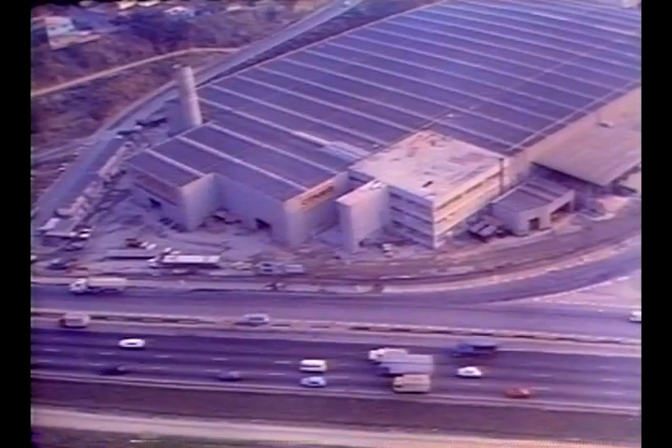This is CONSID, the largest manufacturer of precast concrete construction in Brazil. Check for yourself the concrete facts that allow CONSID to hold 70% of the market and keep on growing, and the solid reasons why CONSID is the ultimate word in precast and post-tensioned construction.

From the early stages of precasting to the end of construction, CONSID employs strict control to ensure that the instructions in this manual are followed with precision.

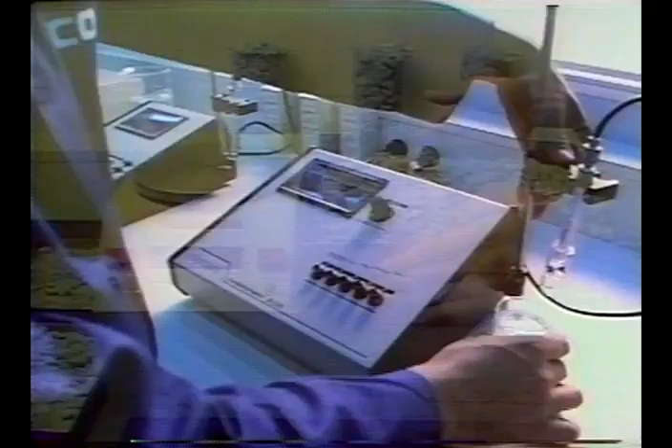At CONSID, reliable technology developed since 1958 and strict quality control are basic factors. Control begins with raw materials and follows through all the steps of construction.

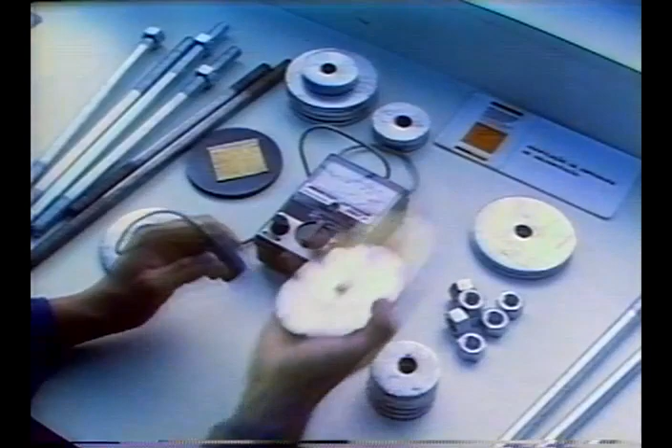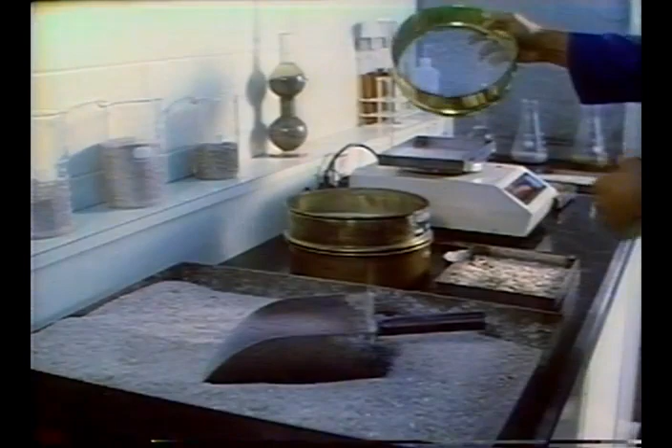In addition, CONSID employs more than 70 professionals, totally independent from production, whose single concern is quality. Quality control is exercised daily, piece by piece, part by part.

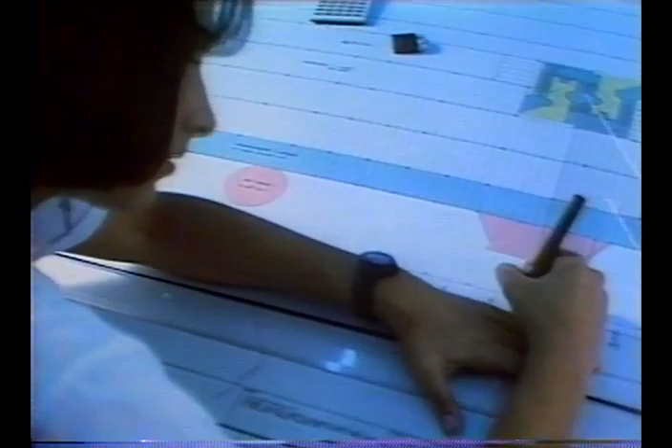Although quality is one of CONSID's major concerns, it is by far not the only one. Delivery dates are also strictly observed. Therefore, each construction project is designed and specified to the smallest detail at the precast factory, eliminating all possibilities of unplanned interruptions that could affect the pre-established schedule.

The building design ensures sufficient rigidity to prevent any damage to waterproofing and structural joints, or even to traveling cranes and their wheels.

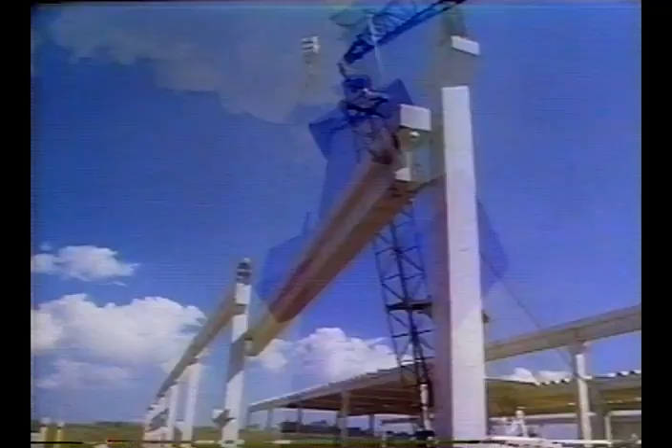Every time you specify CONSID precast construction, you may rest assured of getting perfect mortises and joints. The exacting geometry of precast concrete parts eliminates the risk of inadequate support of beams that would permit cracking of concrete and oxidation of steel reinforcement.

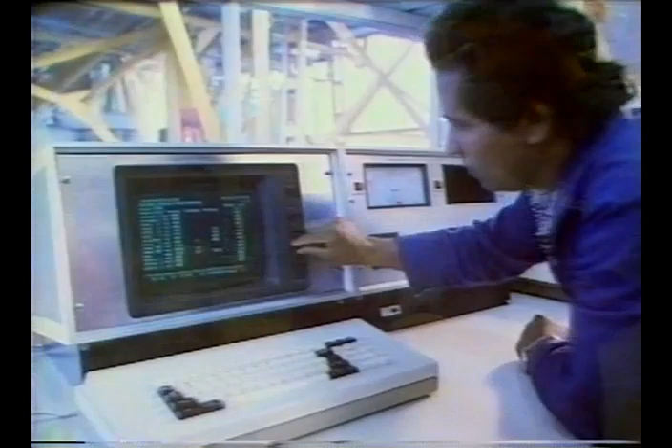When it comes to mixing the concrete, CONSID employs the same quality standards established for all other procedures. Cement and aggregates undergo strict trials to meet the specified concrete strength.

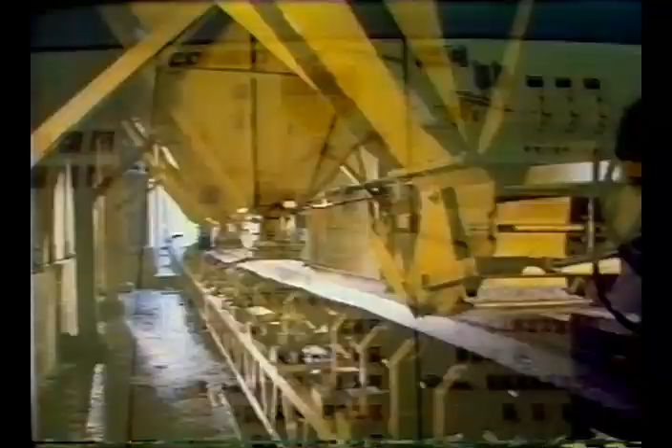Aggregates are stored in separate containers to avoid the imprecision associated with pre-mixing. All mixing operations are controlled electronically, from loading of aggregates to pouring of concrete mixture.

With the aid of a computer, any of 99 different concrete formulas can be prepared at a ratio of 1 cubic meter per minute.

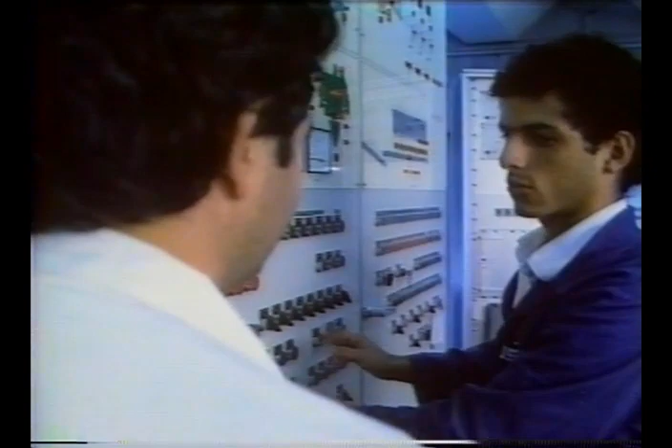A special concrete mixer with mixing implements that move independently of the bowl has 110 horsepower. This is 4 times as much power as conventional concrete mixers and produces a perfectly homogenized mix.

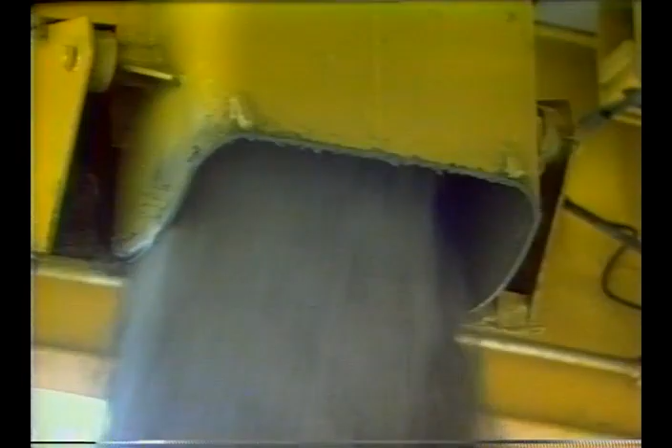The wire mesh is laid on the pre-stressing bed by means of a special conveyor that eliminates the risk of damage to mesh wires.

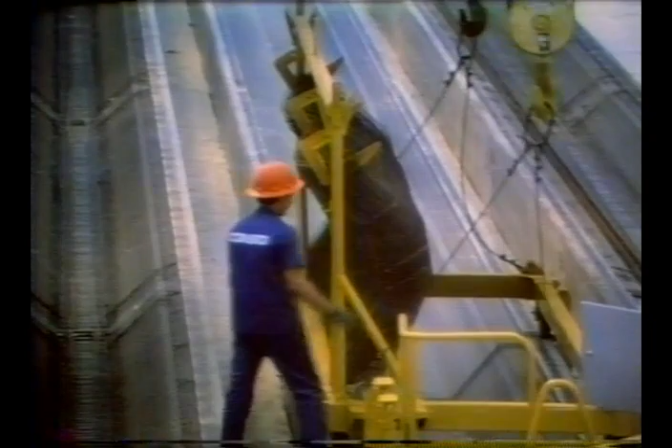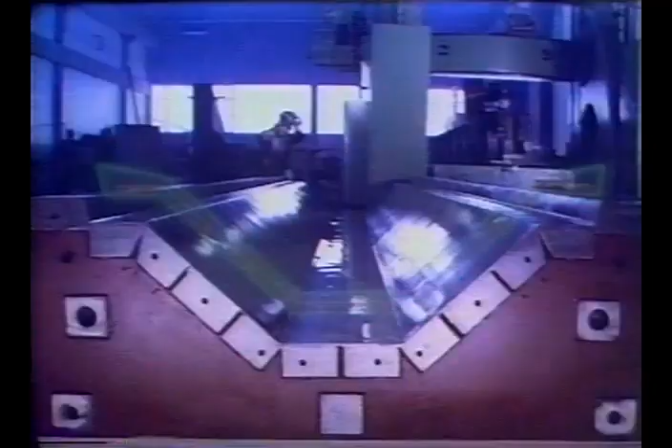Every time you specify CONSID precast construction, you are also ensuring an adequate concrete cover for steel reinforcements, made possible through the perfect geometry of the metal molds. Any irregularity in them will leave the reinforcement near the surface and in a short time oxidized.

The correct bending and assemblage of steel reinforcements is another key factor in preventing exposure and corrosion. Undoubtedly, quality metal molds produce quality precast construction.

CONSID's private metal workshop employs more than 100 mechanical engineers and workers in the production of molds and equipment.

Sheets up to 8 inches thick are cut on this oxyacetylene cutting table equipped with a photocell.

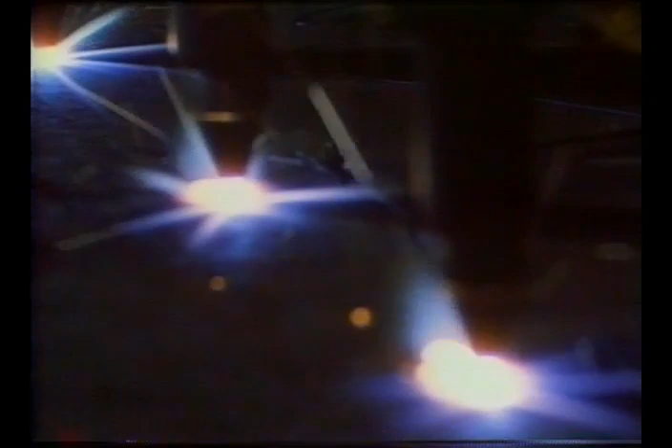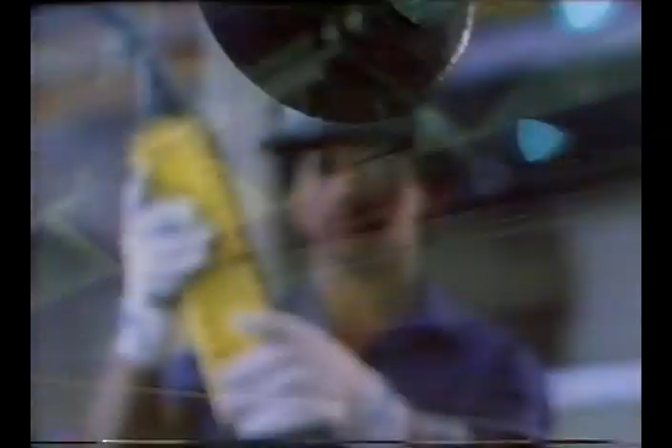Sheets up to 1/2 inch thick and 19.5 feet long are cut in sheet metal cutters and bent in this 700-ton capacity bending press, thus eliminating mold welding.

The exacting geometry of precast concrete is attained thanks to the machining of the mold, which presents a tolerance of 0.2 of a millimeter at critical points.

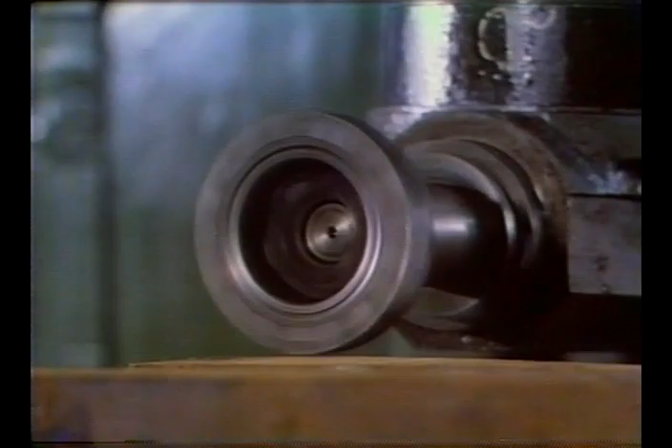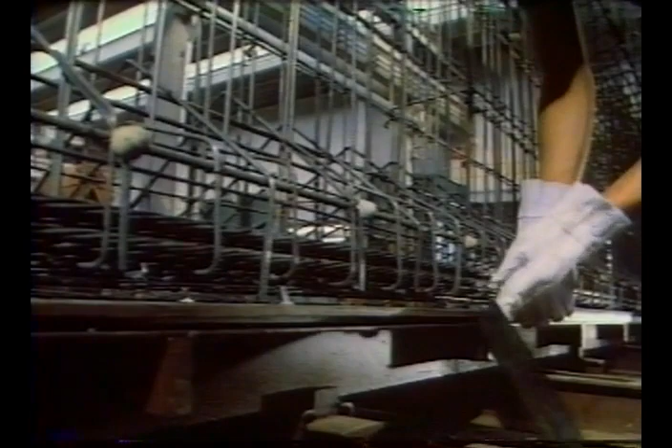Butt splices are carefully finished and fitted, and they are tightly sealed to prevent leakage, which would cause porosity in the concrete.

The beds, 170 meters long, are thoroughly cleaned and carefully prepared before each concrete pour.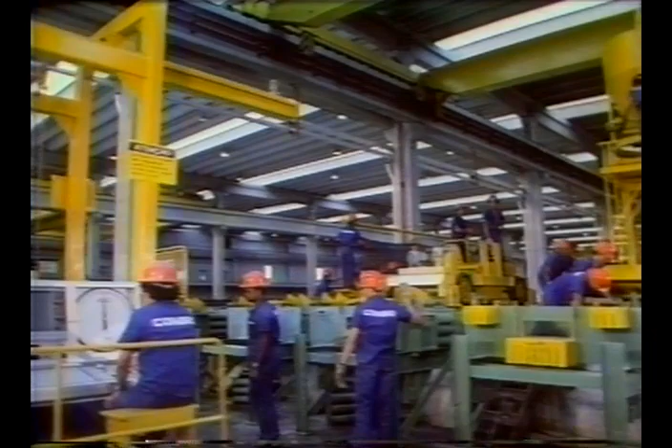Pre-stressing is another very important stage in the production of precast concrete.

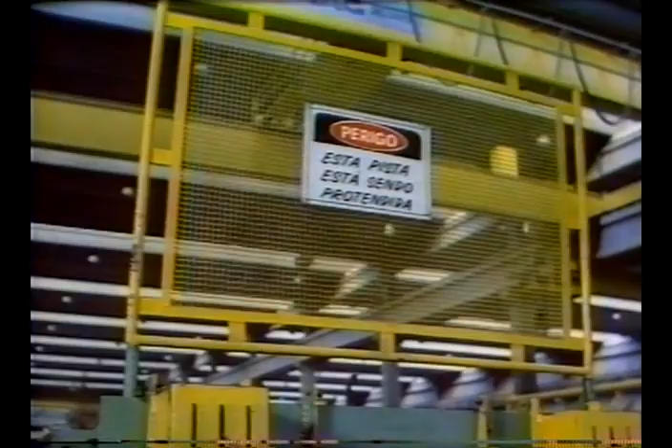Employing advanced technology, CONSID has designed and built hydraulic jacks to achieve even tensioning of steel cables. The proper tension of each one is assured through the simultaneous measurement of the elongation and the force applied.

I-beams are cast on beds 150 meters long, mounted on piles, so as to eliminate any possibility of motion.

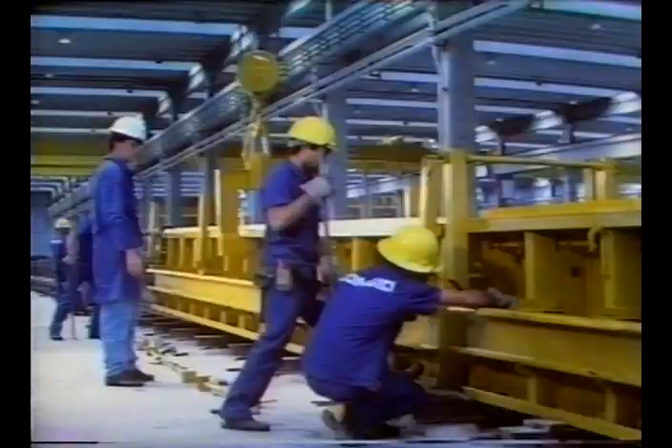This concrete pouring machine, which guarantees the accurate thickness of concrete laid on the bed, is an example of equipment designed and built by CONSID.

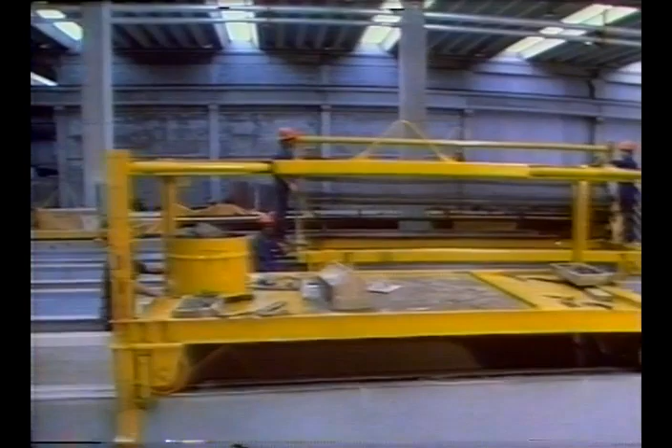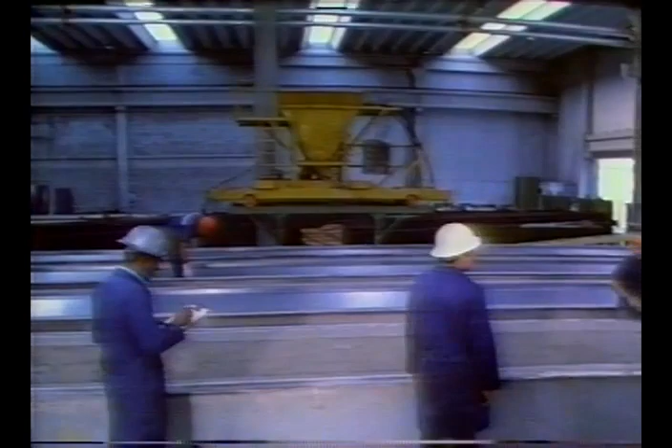This equipment is used for finishing of W roofing pieces, as well as to guarantee accuracy in length and squaring.

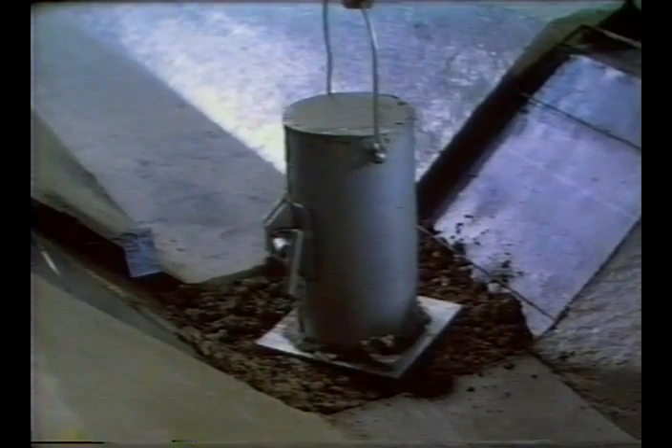Steam curing is obtained with steam generated by 3 boilers at a rate of 8,000 kilograms per hour. Besides accelerating the development of high initial strength, steam also provides adequate moisture for concrete hydration.

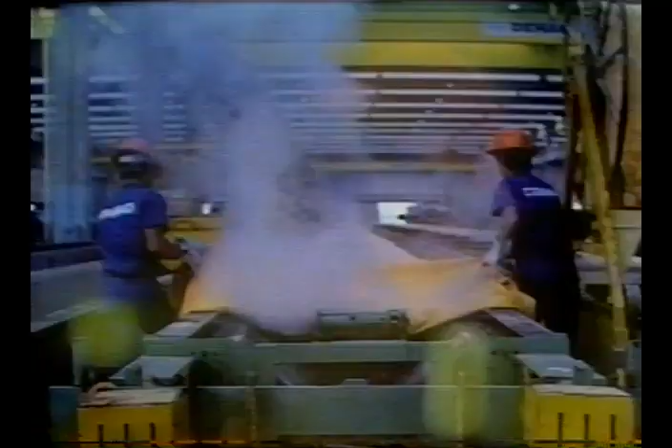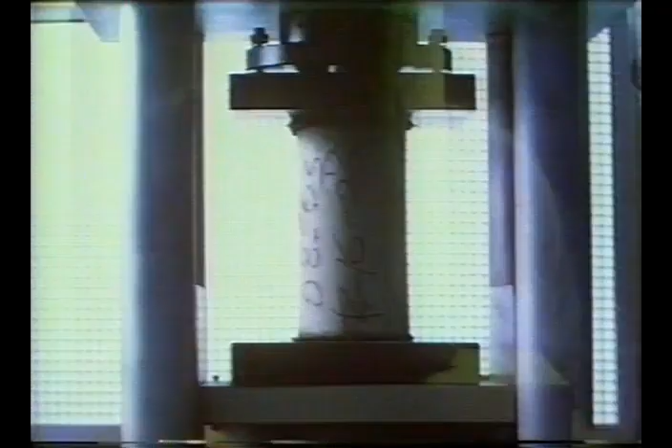Precast concrete parts are removed from the molds only after test samples indicate that the project's specified minimum strength has been reached. The result of this process is a top quality product, the CONSID Precast Construction.

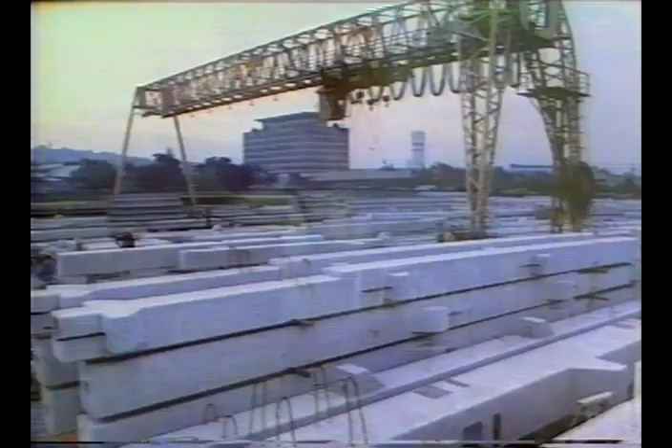CONSID precast concrete parts are individually labeled during casting, and their history is filed for future reference.

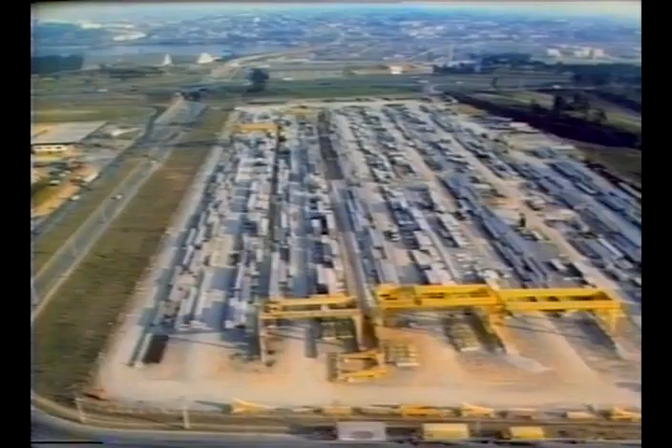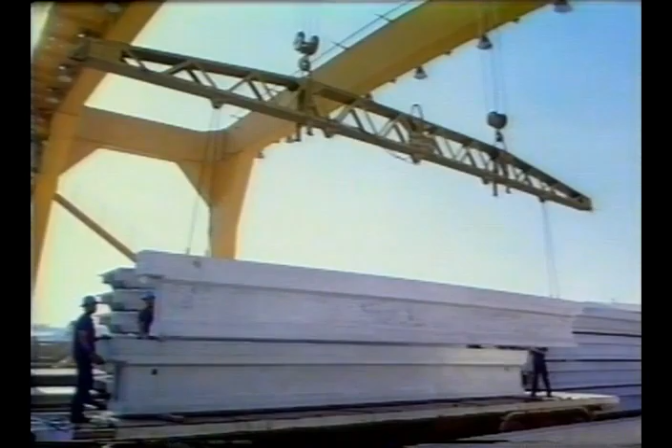Equipped with modern gantry cranes built by CONSID, the 100,000 square meter warehouse provides storage capacity for 5 months of production of precast concrete. Supports provide adequate leveling for precast products, thus eliminating the risk of damage.

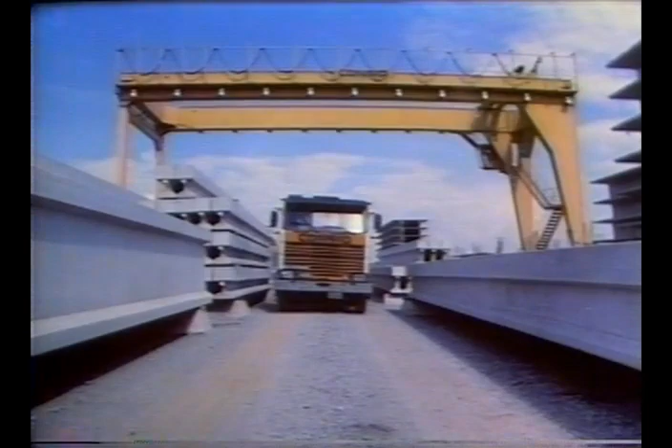After passing inspection and control, precast units are shipped to the construction site. Specific cradles and strict transport regulations ensure product safety. All necessary precautions are taken to ensure that CONSID precast concrete is delivered to the client with the same quality that it leaves the factory.

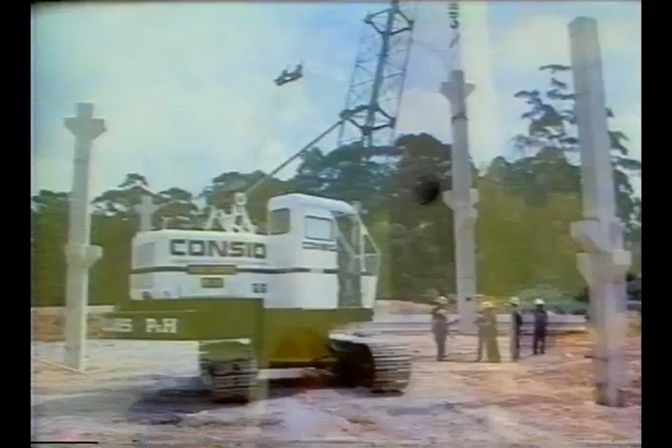At the construction site, a small team employs modern equipment to assemble precast concrete and provide finishing work. Foundation blocks are built with sockets to accept precast columns. Following specifications, columns are cast with built-in drain pipes for rainwater.

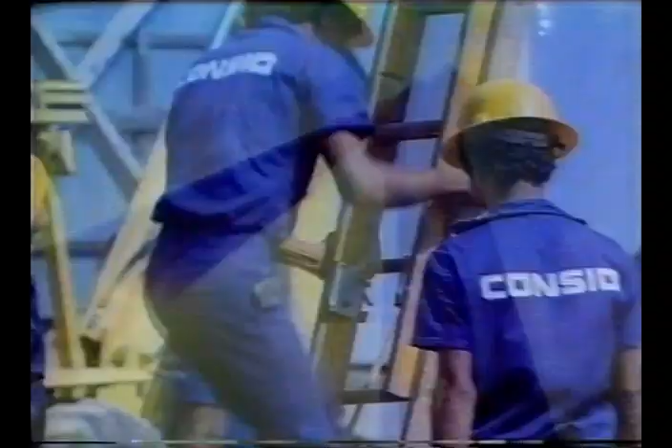Neoprene sheets are used to prevent fissuring of shoulder edges. 2 guide rods are positioned to guarantee additional solidity to beams.

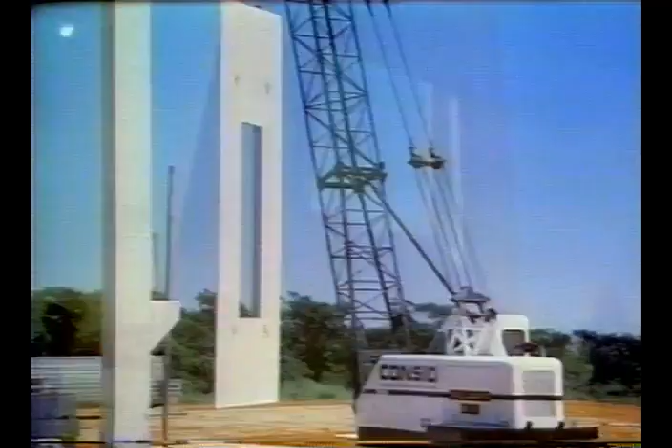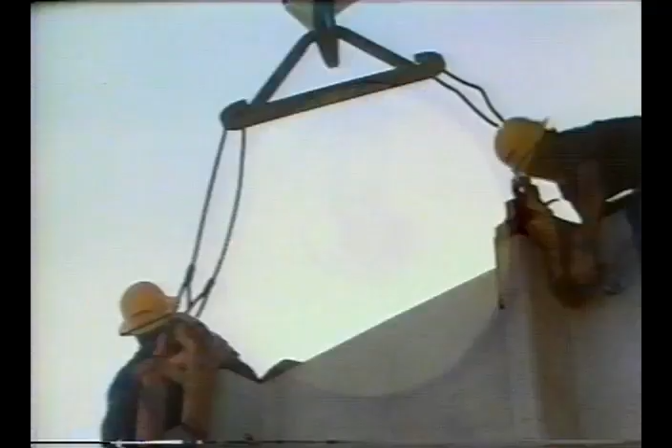The accurate geometry of metal molds permits the fastening of siding using bolts placed horizontally, which eliminates the need for structure welding.

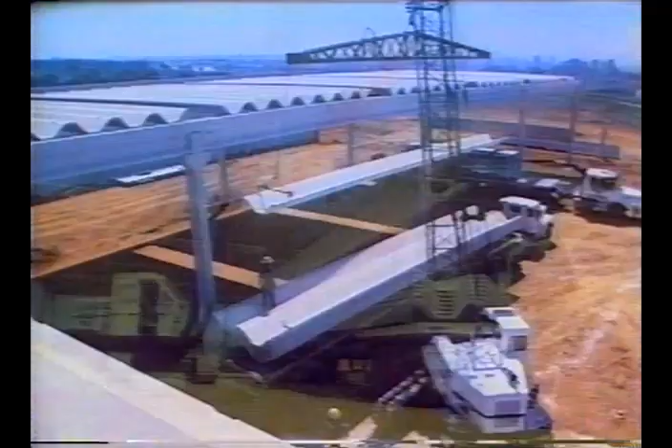The W concrete roofing owes its attractiveness and functional aspects to the constant quest for perfection. Now the waterproofing is being completed.

Precast columns and slabs are sanded and dusted before delivery, an operation of an aesthetic nature designed to ensure that CONSID precast concrete maintains the same quality externally that it has internally. CONSID is the only company that precludes in the contract the painting of the surface of the products with grout, because the products are perfect and there is nothing to hide.

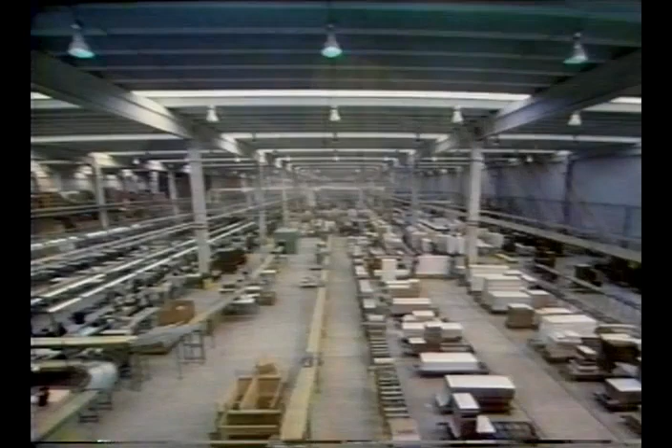The CONSID precast construction system employs modern technology in all areas of construction design, including lighting and ventilation.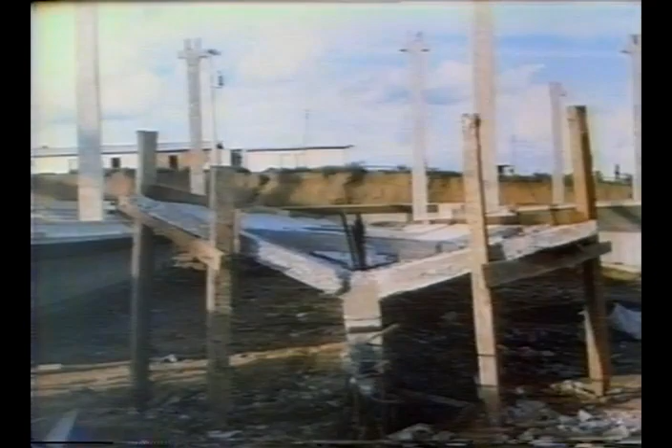CONSID precast construction is pre-specified and post-warranted. Through its contract, CONSID provides its clients a top-quality construction that follows strict technical specifications. In addition, it offers as reference a reputable building experience, a sound managerial structure, and the commitment to serious, highly qualified work.

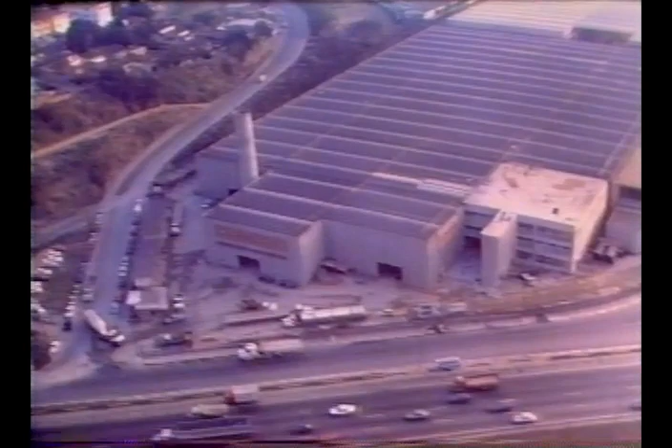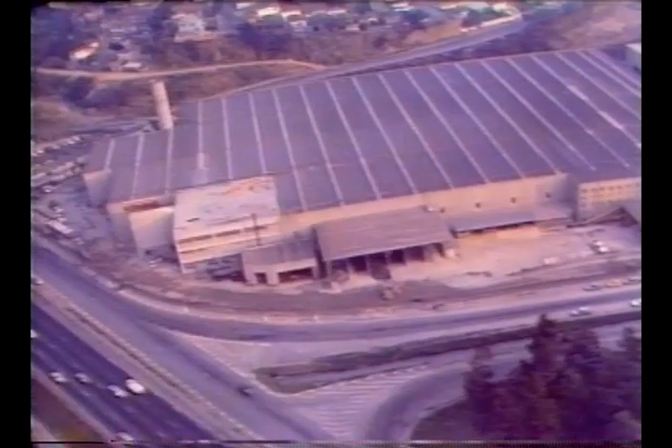Before contracting your builder, be sure to visit CONSID's plant as well as the competition's. Read carefully the specifications manual that accompanies the CONSID contract. Then read the competition's, and you'll understand the reasons why only CONSID offers unique, top-quality standards. The choice is yours. The quality is CONSID. CONSID Construction: precast, pre-specified, and post-warranted.

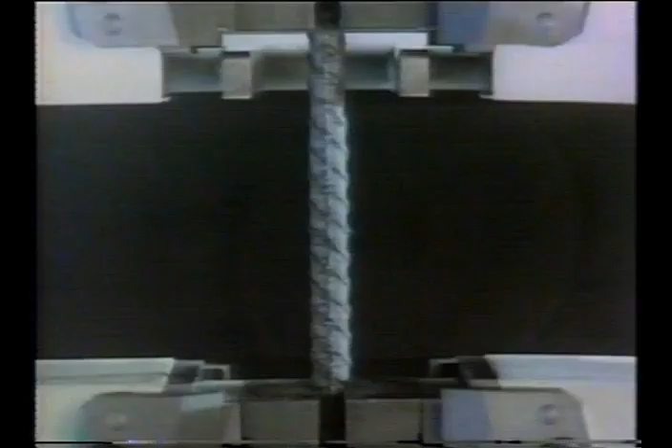CONSID Precast Construction. Why CONSID?

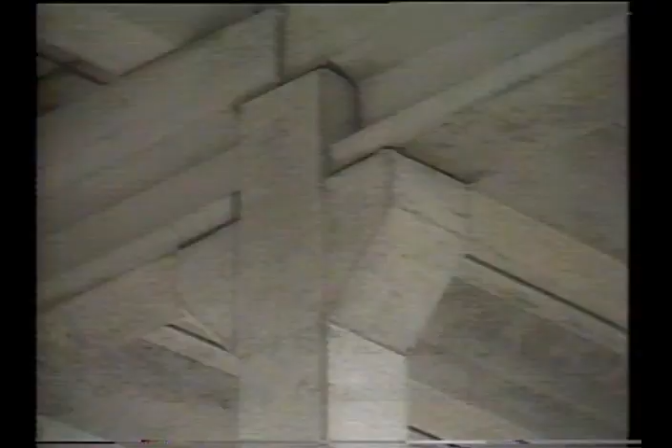In my opinion, CONSID offers quality that is much higher than that of conventional construction. Deadlines were always strictly met and timetables always followed, so much so that we're building with CONSID for the 4th time and intend to hire them every time we build.

We were importing a product and for that reason needed to have a 4,300 square yard factory built in 6 months. At first, it seemed like an impossible task, but we found an option in precast construction.

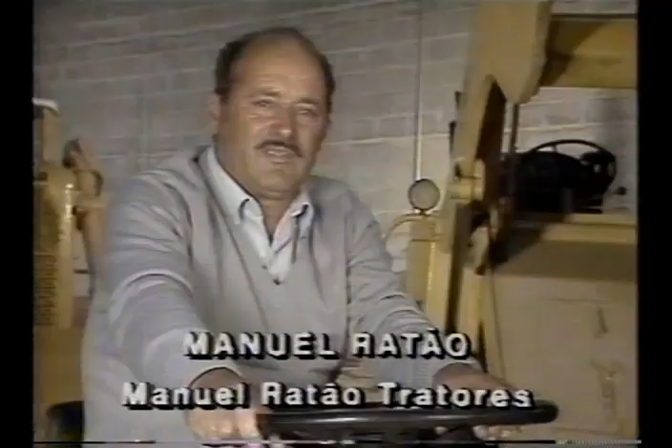Well, when I first thought about building, I called CONSID. I had my building plans and wanted a good job done fast. Then I heard CONSID met deadlines, so I thought I'd hire their services, and I'm glad I did. And sure enough, they finished the construction right on time.

We as a construction company have hired CONSID over the last 4 years to build more than 359,000 square yards of warehouses and industrial facilities. Our concern is with the good reputation of our company and guaranteed deadlines. This means we must contract totally reliable services, the case of CONSID.

As wholesalers, we chose CONSID Precast Construction. We needed large storage capacity, relatively high ceilings, economy, safety, and strict delivery programs to lower the overall cost of construction. We were so satisfied with CONSID that we're going to build a new addition.

Quality has always been one of our main concerns. Not only product quality, but quality of the entire process, including customer service and transportation from the warehouse to the retailer. And a well-packaged product also reveals concern with quality.

That concern led us to choose CONSID Precast Construction. Why CONSID?

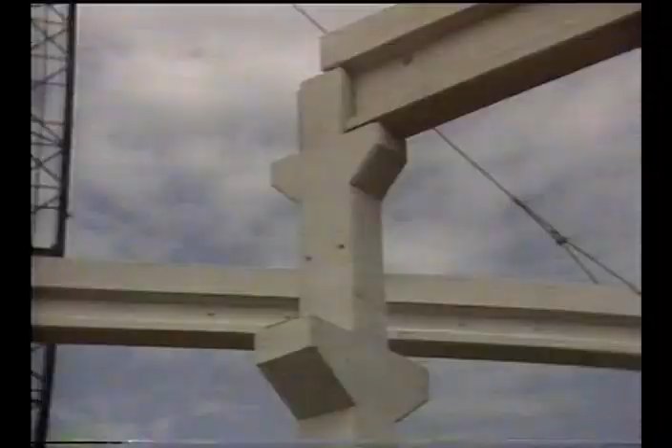Once again, we chose CONSID Precast Construction for its traditionally excellent services, for its well-detailed building design, top-quality materials, stable prices, and reliable schedules. This is our 4th CONSID construction.

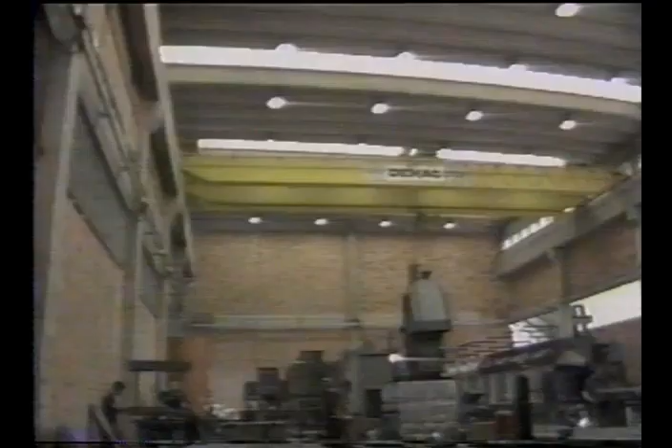Our problem was to build a new factory on the same location of the old one without interrupting production. Our solution was the CONSID Precast Construction, with its quality, prices, and deadlines. We were very satisfied and plan on expanding again with CONSID.

When we first hired CONSID, our concern was delivery. We were surprised that in addition to quality, the timetables for precasting and assembling were strictly followed. We have 18,000 square yards of CONSID construction and will soon begin construction of an additional 12,000 square yards with CONSID.

A major construction project such as Piracicaba Shopping Center required that Constructora Romeo Shop hire a contractor completely reliable concerning project, product quality, and punctual deliveries. For that reason, we chose CONSID Precast Construction.

This was the 2nd time that we hired CONSID. They built our facilities in Registro, following a strict schedule and maintaining high-quality standards. In Santos, we were faced with the threat of corrosion, which was eliminated with CONSID Precast Construction, and we enjoy the extra advantage of easy maintenance of the building.

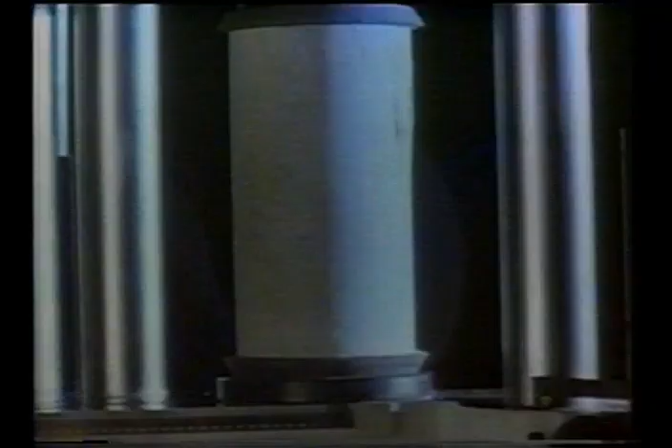CONSID Precast Construction. Why CONSID?

In order to supply steel belts to the market, Armco Equipetrol had to construct an additional building. After examining various proposals, we chose CONSID. Their construction system conformed with our particular specifications, which included a limited budget and an important short-term delivery program.

Because Probel supplies and demands product quality, and from CONSID we're sure to get a modern and safe building built according to the timetable. In addition, the CONSID system provides for very good lighting and adequate ventilation, which are basic requirements for comfortable working conditions and better productivity.

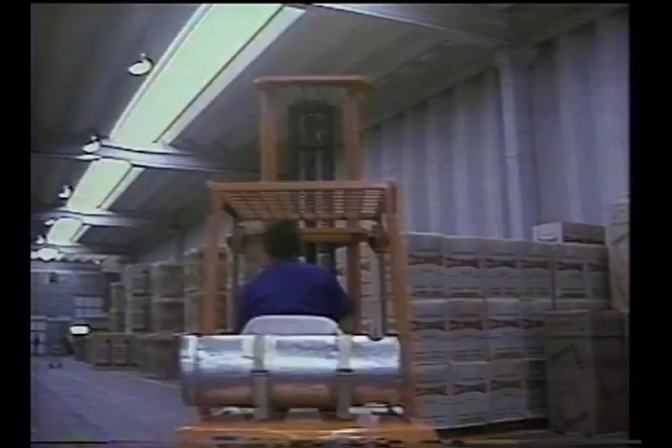At Magazine Luiza, we chose CONSID for excellent reasons: extraordinary quality, good prices, efficient customer service, for safety, and also the delivery program which complied with the approved schedule, and that's very important.

Because for wholesalers of cosmetics and drugs, such as Casa Leal, the size of stores is highly important. The need to build a new large store with modern architecture, good ventilation, and natural lighting led us to CONSID. They offered us efficient solutions and top quality. The result was highly positive.

Because when you sell quality, as Cobrec has been doing for 25 years, you get in the habit of demanding quality from suppliers. Well, quality is what CONSID offers with its precast construction system, which has allowed us to expand our industrial park always within the shortest periods of time.

CONSID Precast Construction. Why CONSID? The quality of our products is a basic factor.

Therefore, for the construction of our factory, we chose CONSID. Their quality and strict timetables offered us economy and less building time. Today, 10 years later, we can attest to that.

Máquinas GB decided to build with CONSID for the efficient customer service they offered in the interior, plus the lighting, ventilation, and economy in their projects. I'm very pleased with CONSID.